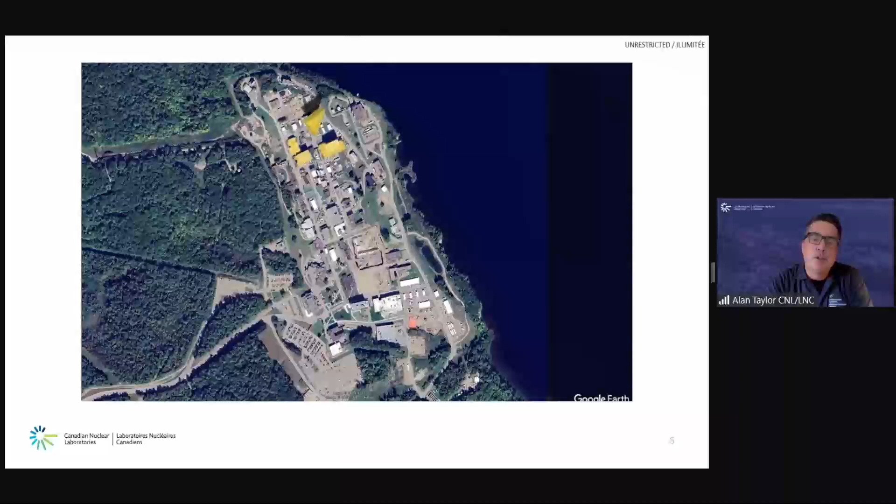All right, we'll start off in the beautiful Ottawa Valley and the Chalk River site. So at Chalk River, we're looking at the two units that are still installed within the facilities, and that is the NRX and NRU reactor.

The NRX and NRU are both research reactors, built and designed back in the 40s and 50s, and have run as recently as 2018.

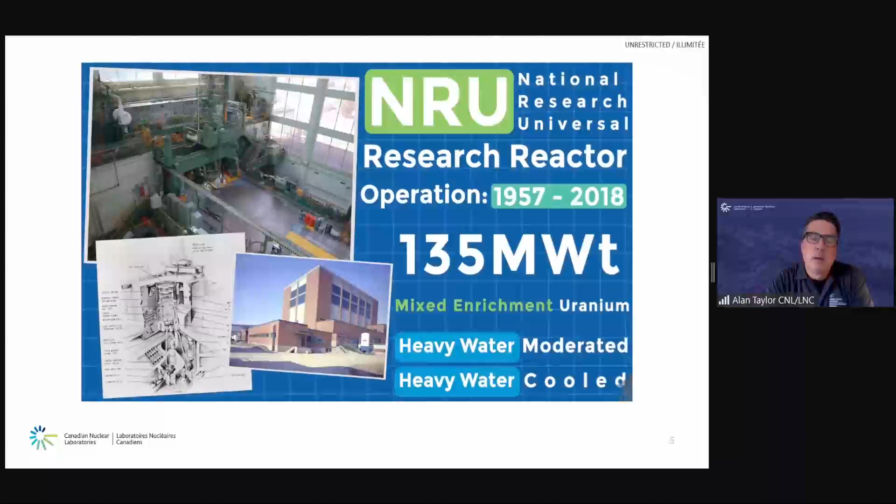We also have in the portfolio the two Maple 1 and Maple 2 reactors. These were isotope producing reactors that were in operation from 2000 to 2008.

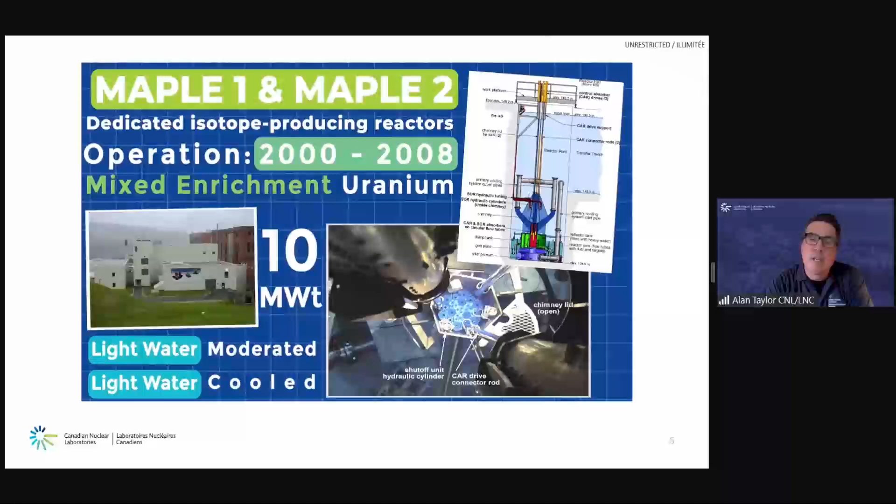Additionally, staying in the Chalk River area, we have 3 legacy calandrias which were removed from service back in the 50s and 70s and now lay to rest in the waste management areas. We have an NRX A, an NRX B, and one of the calandrias from NRU.

Talked a little bit about NPD. NPD is located very close to the Chalk River site. As I said earlier, it's not part of our portfolio, but I think it's important to highlight that it is one of the reactors that AECL and CNL are working on the decommissioning for.

Out in lovely Manitoba, we have the WR1 reactor.

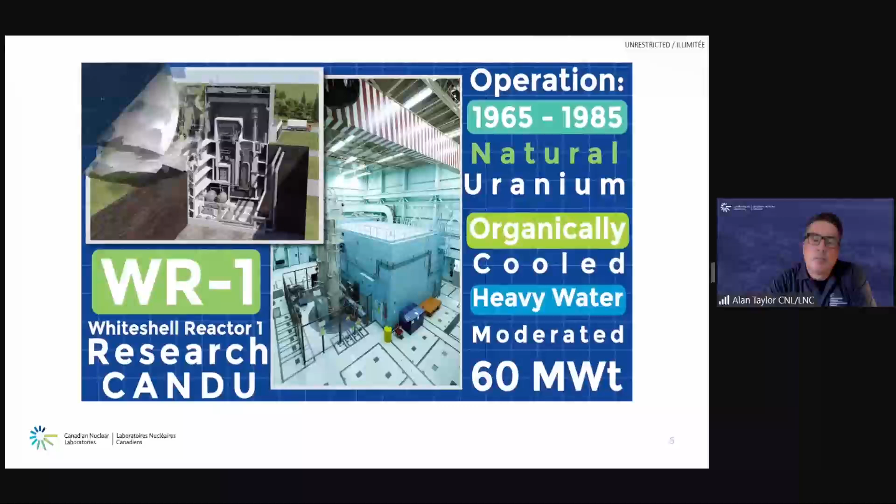And then flipping the script back to the reactors that fall within the reactor seg portfolio, we have the Douglas Point reactor, which is in Bruce County, out at the Bruce Power site. This is actually the second in line of the CANDU prototypes, prior to the Pickering and Bruce reactors that were built shortly after.

We also have a unit in Bécancour, Quebec, Gentilly-1, which is a unique design. It was a boiling water CANDU prototype. This unit is located on the banks of the St. Lawrence River.

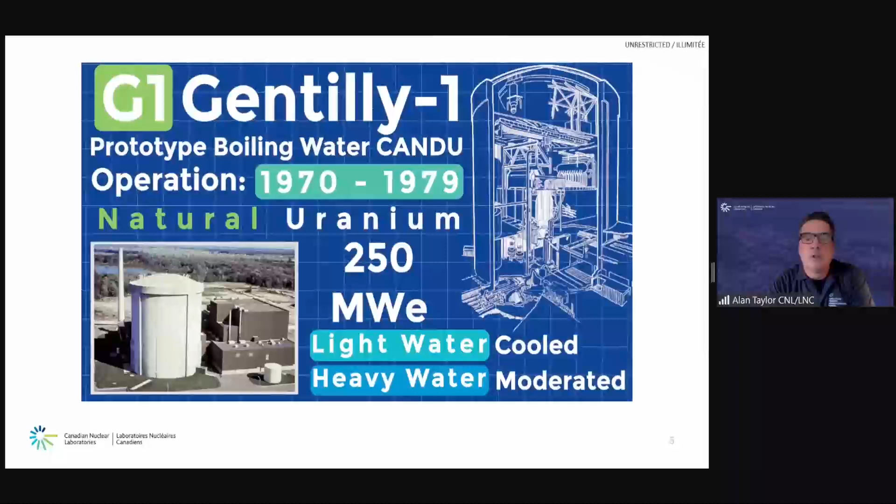All right, so we'll shift to a bit of an overview of a comparison of the reactors. We've had a chance to see where they're located geographically, but let's go over a few points about a comparison between them. Starting on the left side at the G1 and Douglas Point site, those are located off-site of Chalk River. And then we have the NRX, NRU, the Maples, and the 3 legacy waste units - they are in the Chalk River site.

The units that are titled in blue are installed in their bioshields. A bioshield is essentially a large, heavy-duty concrete structure within a robust building - that's where the reactors are located. The other 3 units in the legacy waste category are placed in legacy areas of the waste management zones at Chalk River.

When we look at how we go about moving waste, once we start dismantling these reactors, the Douglas Point and G1 sites will have to utilize public roads to move specialized containers. But for the other units, all the movements of material will be within the CNL, the Chalk River lab site.

For the movement of the waste, we make sure that we are using specialized containers designed for purpose, and moving them to approved storage areas.

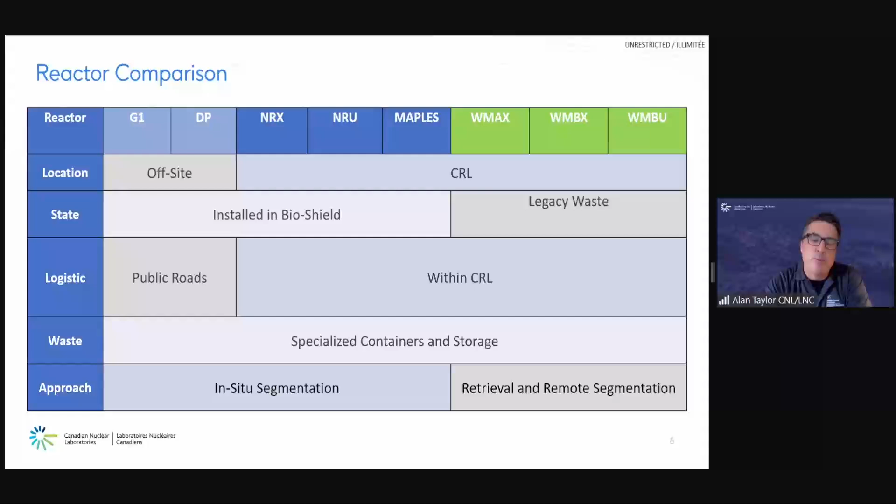All right, let's talk a bit about strategy then, and how we've developed our plans on where we are now and where we need to go in the future.

When it comes to developing strategy, there's certainly multiple items to be considered, but today we're going to talk about 6 key aspects that we've put in place in order to develop a strategy output. Those are review of records, modeling, collaboration and benchmarking, technology, waste options, and a discussion about optioneering or best available technique study that we do. And then I have a video that's going to show some of the good work we've been doing from a characterization standpoint.

When you bring in those strategy inputs, then they lead you to a strategy output that we believe will be successful for us to complete the portfolio of work.

From a records and modeling standpoint, we take a lot of time to review our records, things such as operational records from when the facilities were running, construction drawings, or any modifications made to the facility. It's to gain an understanding of how these units were constructed. Units like NRX were constructed back in the late 40s going into the 50s. The Douglas Point site and the Gentilly site were built primarily in the 60s. So we go through the records and ascertain all the information we need to make intelligent decisions on how we move ahead. A big component of our work is reviewing these records and looking at the historical operation.

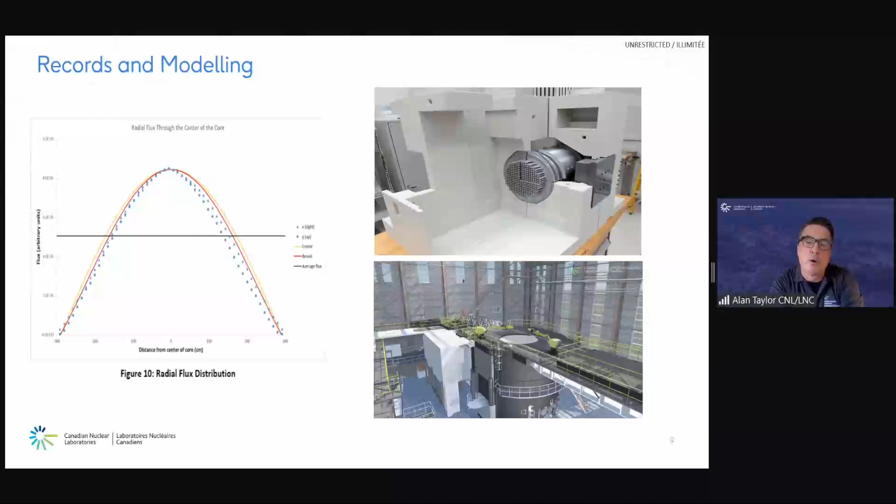Finally, on the bottom right, we have a team of experts here at CNL doing digital renditions, or digital twinning. That's something new to us - we're taking our information on these reactors and creating very detailed and sophisticated models. These models are fantastic for putting our plans together. We can input all sorts of criteria into them, including activity modeling or radioactive readings that we get when we're in the field, to help us put together a safe and robust plan. It's another tool that's very valuable for sharing what we're about to do with the public, giving an idea of the units, how they looked, how they're laid out, with a real benefit towards understanding.

Our second key component with regards to our strategy inputs is collaboration and benchmarking. We're not the first country in the world to do this type of work, so it's important for us to learn from our counterparts. We have collaboration agreements set up with Germany, France, the UK, and the US. No one in the world has yet to do a CANDU reactor, but we glean lots of information. We share information and lessons learned with our collaboration partners and can put that into part of the planning on how we dismantle our reactors. It's key that we maintain a robust collaboration and benchmarking effort to stay up with modern practices, to share information with our colleagues, and to glean it from them.

With regards to technology, there's no one-stop shop for how you dismantle these units. We know we're going to be dealing with material that could be heavily activated or highly radioactive, so the luxury of handing a set of hand tools over to capable workers and asking them to go in the field and dismantle these units just doesn't exist. We will be using remote technology, robots, tools, etc., that will allow us to work in a safe, remote environment in order to segment the units.

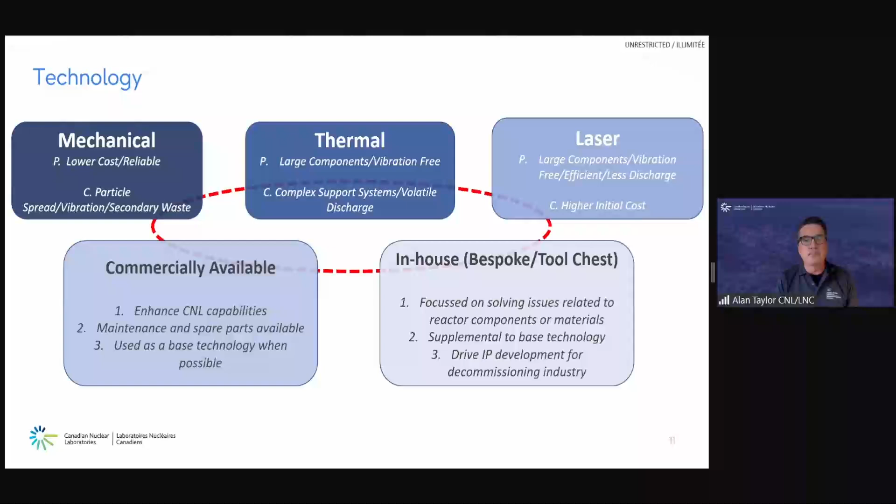So with regards to waste, there are options on how we handle our waste when we start segmenting these reactors. All of our waste and how we package it and move it is governed by very robust procedures and the use of pre-approved packages prior to dismantling.

So think about it this way. Once we're in the field, prior to completing any cuts, we will have a number of different options of containers to choose from. And we'll fill those containers based on how we want to transport them, where they are going for interim storage, where they may be going for direct disposal - I'll talk a bit about that from a commercial standpoint - and making sure that they are robust and approved for road transportation.

When you segment and dismantle reactors, you're going to primarily be dealing with what we refer to as intermediate level waste. This is waste that requires special handling and requires special packages, and we utilize those as we dismantle the units. Our two primary options for waste paths are interim storage at the Chalk River site, and

we're also investigating the possibility of using the supply chain. There are companies that do deal with radioactive waste. They work with the utilities and work with other areas. And they have the capabilities of taking our waste directly and then processing that in more of a disposal mode.

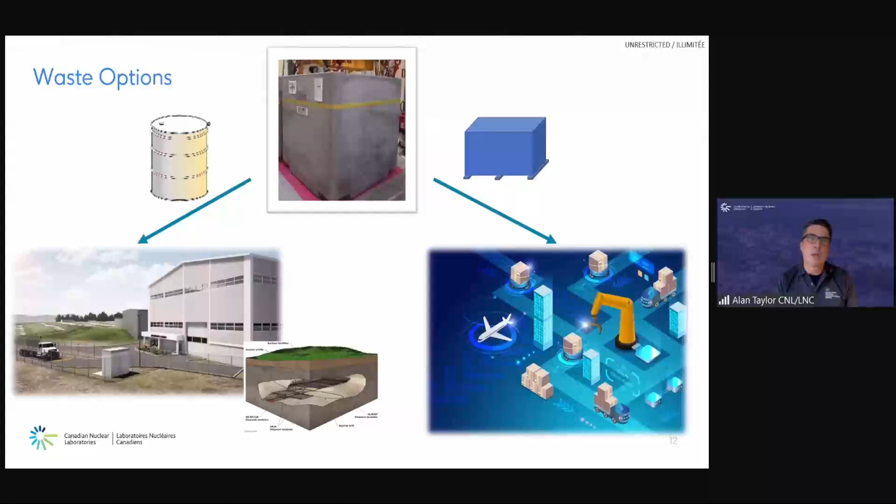Another aspect of putting a strategy together is to utilize a best available technique, or an optioneering process. Really, in a nutshell, what this is, is to identify the challenge that we have in front of us, and then we pull together a formal collaboration of experts that we have in-house.

So we're bringing in waste experts, we're bringing in reactor segmentation team experts, we have mechanical equipment development experts, and characterization experts, etc. So there's a number of different groups, and the best way to describe this is it's essentially a sort of professional brainstorming, so to speak.

We identify the problem, and we define what our scope is, what our boundaries are, constraints, assumptions, etc., and identify attributes. And then at that point, we are essentially meeting to throw any and every option that we can come up with on the table.

We've seen upwards of 24 options that have come out of these brainstorming discussions. But it's important that we need to whittle those down to 2 or 3 really viable options. And we do that by really challenging and breaking down the ideas and scoring these options against attributes that we've previously identified. These attributes may be things such as how easy is it to access the components, or do we have the ability to put these directly into a container, or do we have to do a bit of processing prior to. So a number of different things. But essentially, once these attributes are scored, and we've added weighting factors into it, we'll end up with a result on what our best approach is on segmenting and dismantling the units.

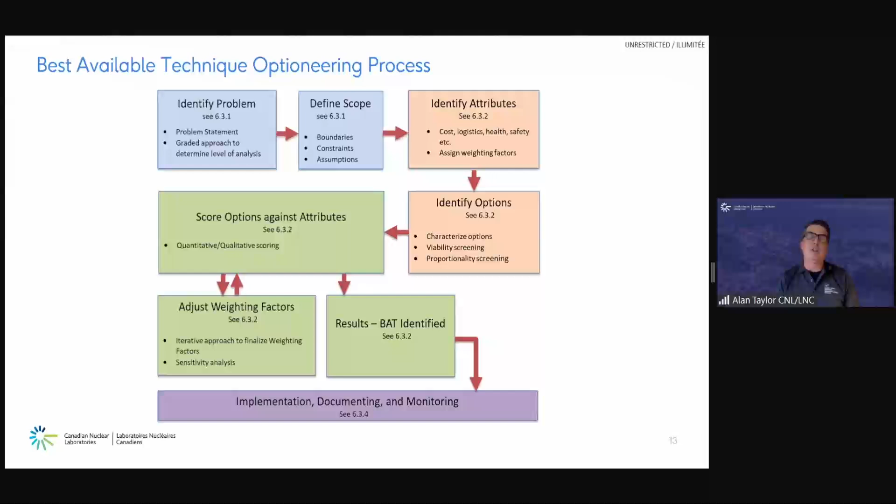All right, so our final attribute with regards to strategy is characterization. And characterization has really been what we've been up to for the last 2 or 3 years. So we have had teams at the Chalk River site, the Douglas Point site, and the G1 site putting together and pulling samples out of the reactors themselves.

Now, the goal of characterization really is twofold. Once we retrieve these samples, they're sent to a laboratory to be analyzed. And then the information that's gleaned from the analysis will be used to decide on a number of different things, such as how we're going to decide which path the waste takes, but also how we're ensuring that we're protecting the worker and the environment and understanding the hazards that are involved.

Additionally to that, the characterization output will help drive the design of our tooling. We can understand how radioactive a component is, and that may allow us to decide whether or not we need super specialized tooling, or can we get away with something that's more simplistic.

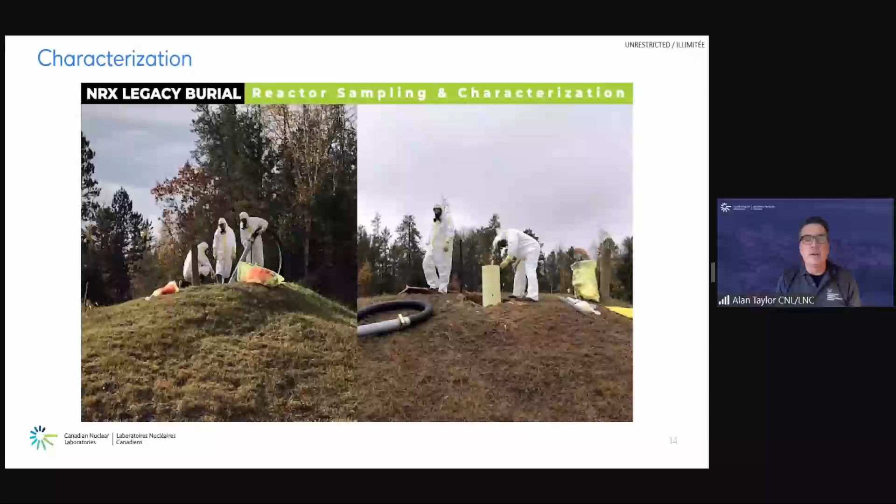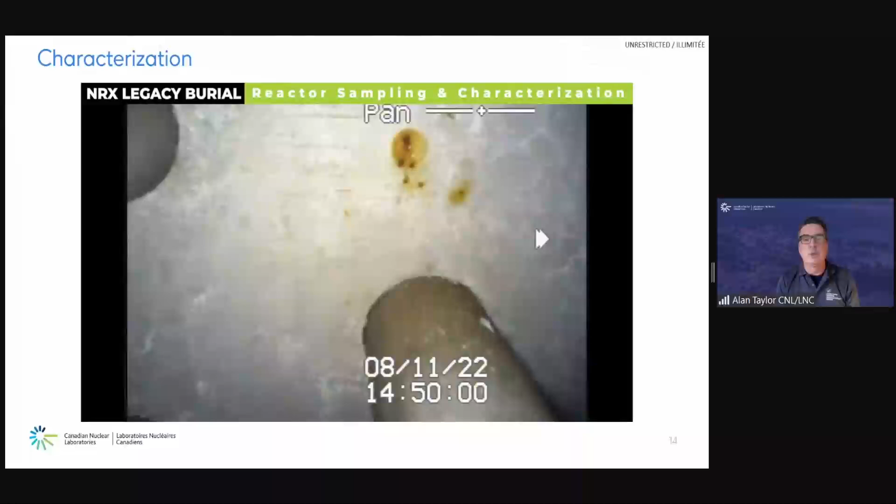Starting off with the buried units at Chalk River, you can see we're using computer modeling, and our workers in the field starting to perform the excavation to get to the reactor, and ultimately pull the samples out of the unit. This particular unit is referred to as the WMA in-house unit, but it's the original NRX calandria that came out in the 50s. You can see some tooling we used that allowed us to breach the reactor walls and insert video cameras to get information about how the reactor looks in its configuration.

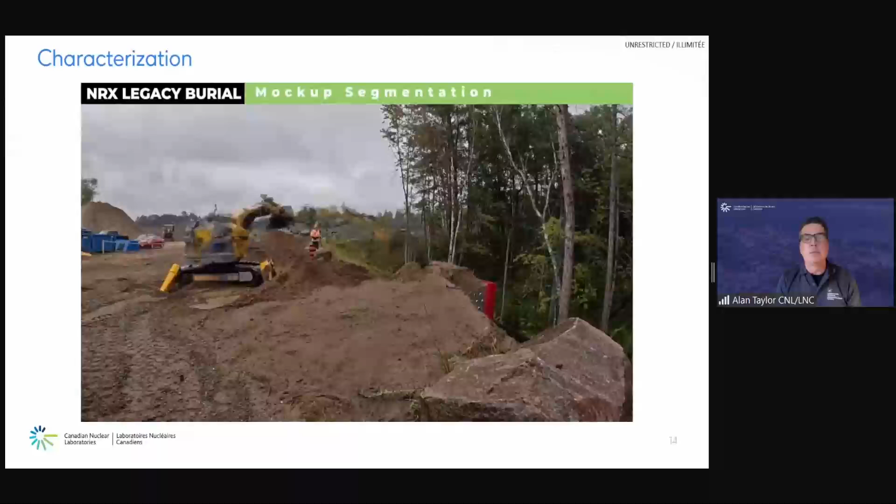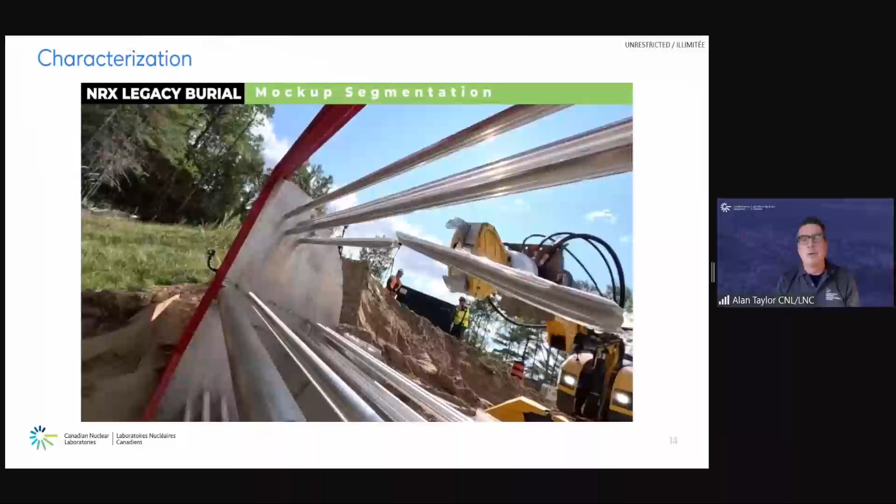Additionally, we've taken some samples of the material and some readings. And this is the mock-up using a Brokk robot. We built a mock-up, placed it in one of our areas in a clean environment, and this is allowing us to see what works and what doesn't work with regards to robotic disassembly of the units.

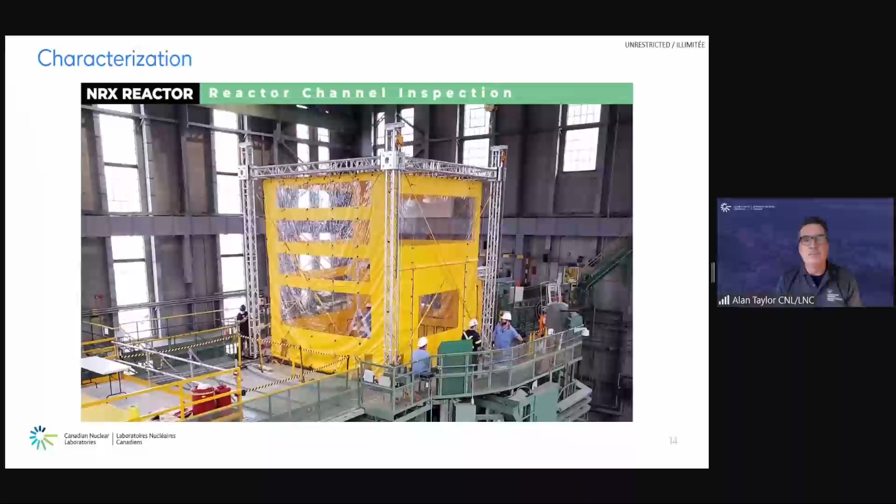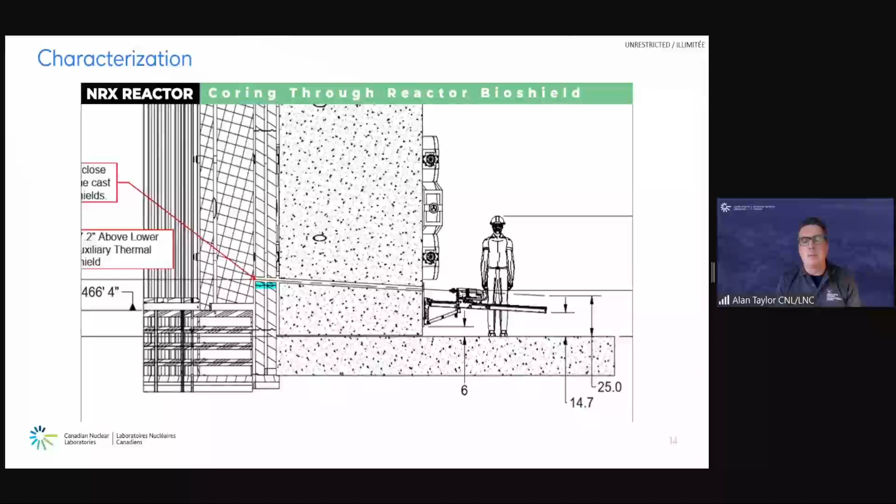Shifting inside, there's a lot of work going on at the NRX reactor: coring holes, taking metal samples, taking concrete samples, gaining information about the graphite installed in the units and other materials. A lot of hard work going on by dedicated team members to pull this work off, and it's been exciting. Had a few challenges, but overall it's been really good work for everybody.

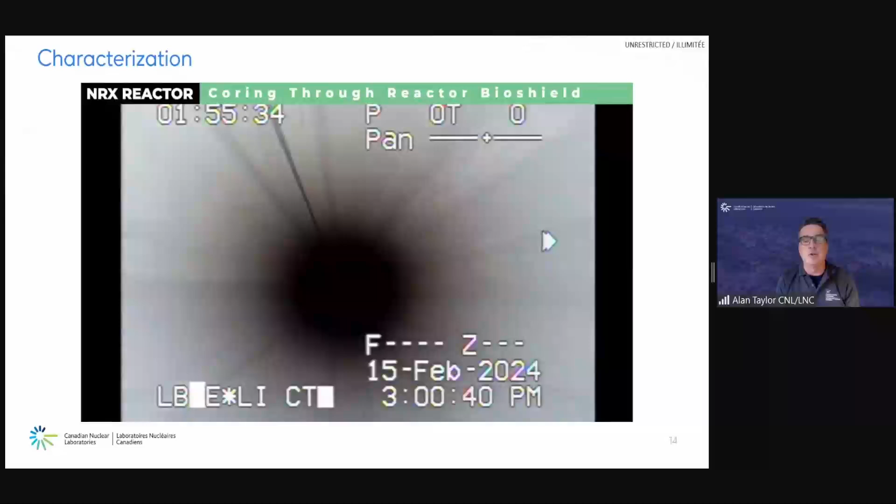Here we're utilizing a combination of off-the-shelf equipment and specialty design tools. You can see a video of the camera going through the concrete core and then eventually into the walls of the reactor itself.

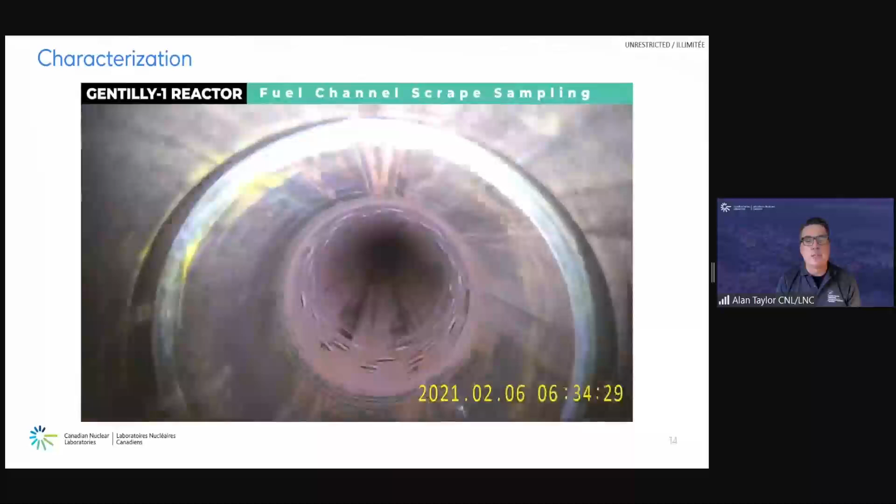At the Gentilly-1 reactor, we've done some internal scopes and measurements of the fuel channels themselves. We got video of going up into a fuel channel, took some readings, and gained a lot of information about how the reactor is configured.

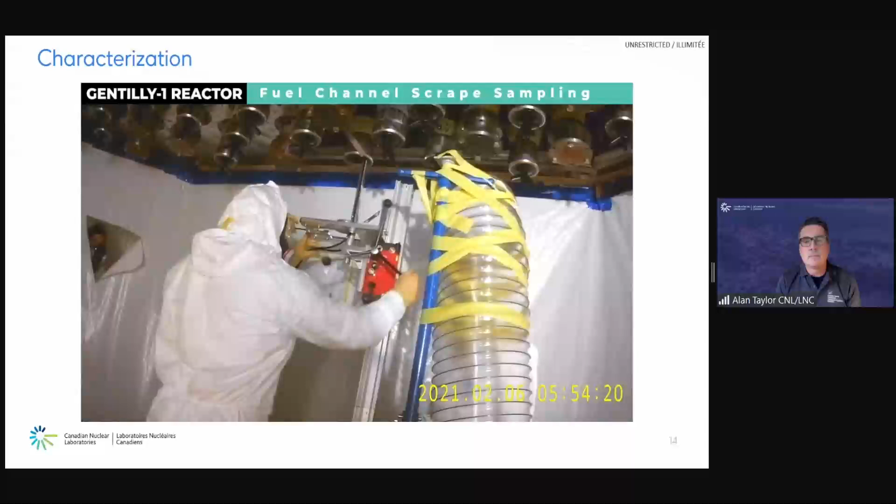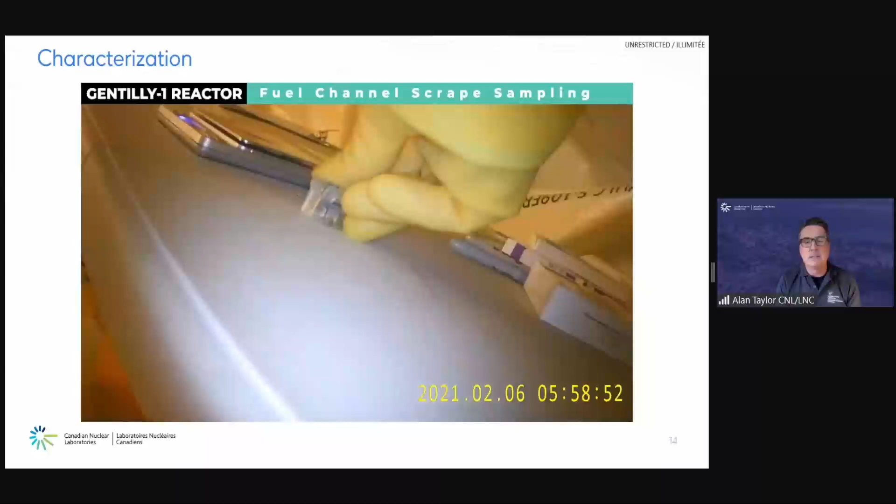Once we get our samples out, we use a chain of custody to take the samples, take some information from them, and then ship them safely out to a lab for analysis.

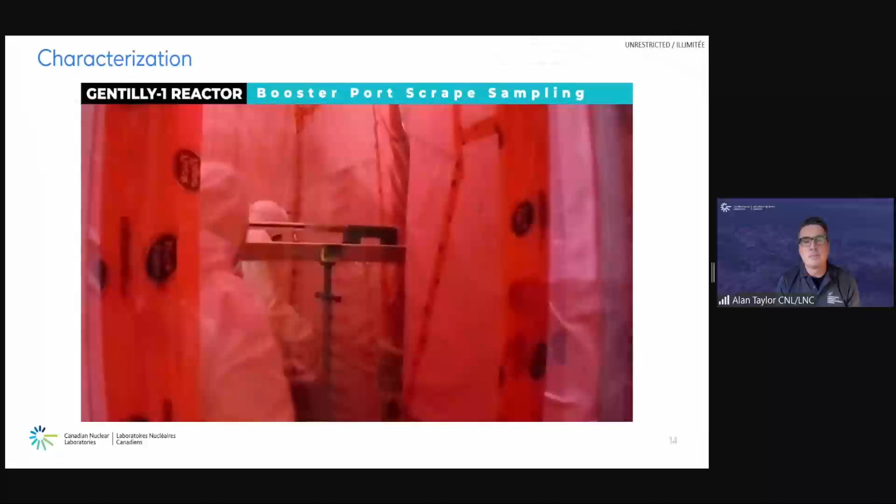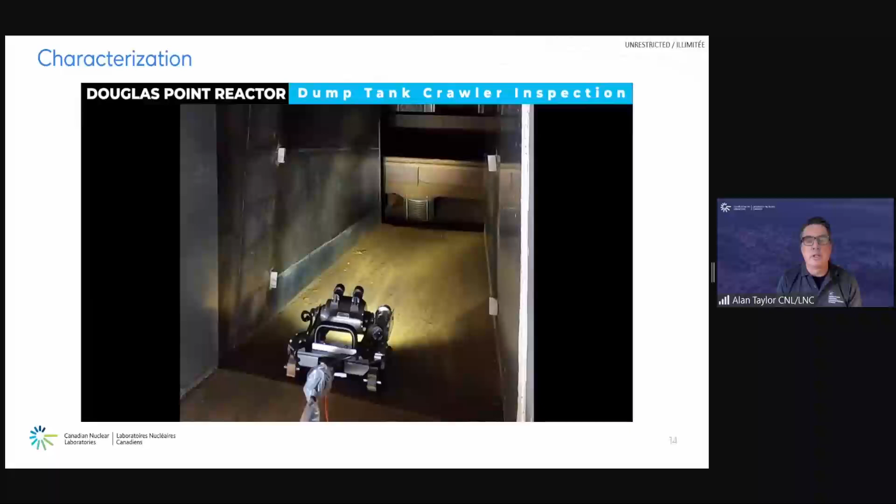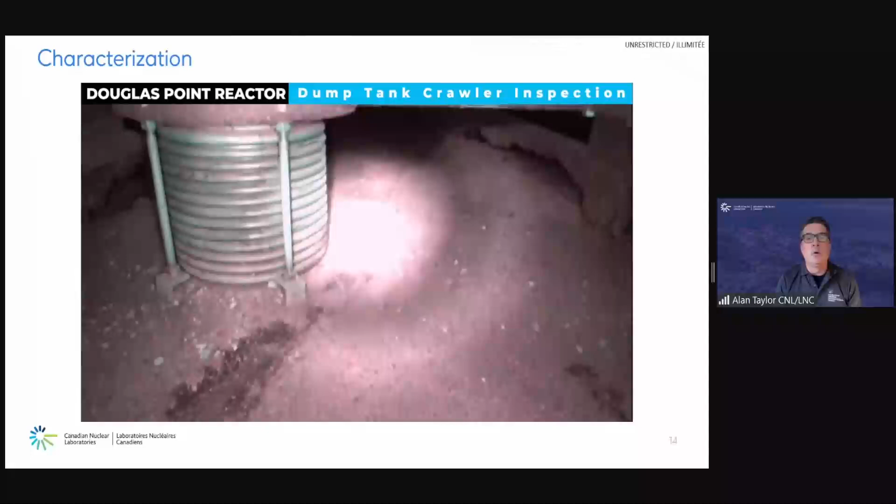Douglas Point, we have a team that's down there actually as we speak, doing some characterization. But prior to doing the characterization work that was more intrusive, we used one of our little specialty robot crawlers to go into the vault and take some video, give us an idea of the current status and how good of a shape, or in this case, perhaps not the best shape, the units are in right now.

So you're looking at the bottom of the moderator dump tank of Douglas Point. And then finally, at Douglas Point, we're in doing samples of fuel channels and gaining information about the radioactivity within the unit itself. Pulling out some of the core samples. There's a video of what it looks like inside the vault.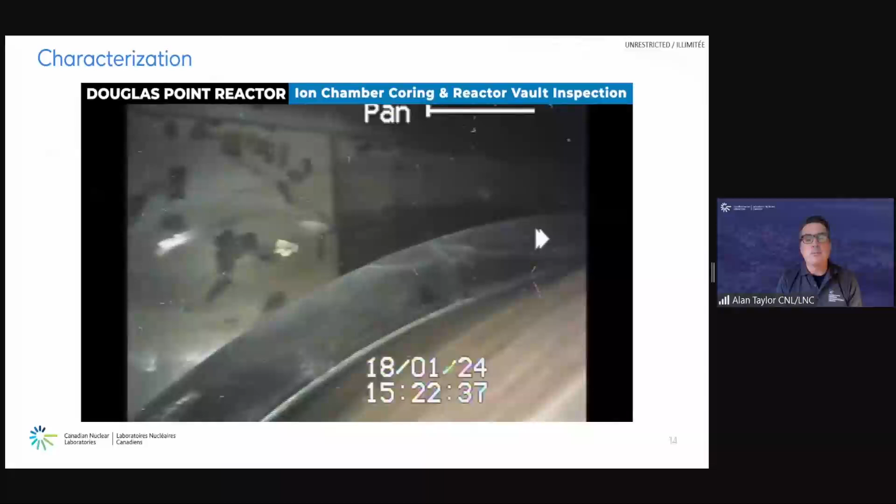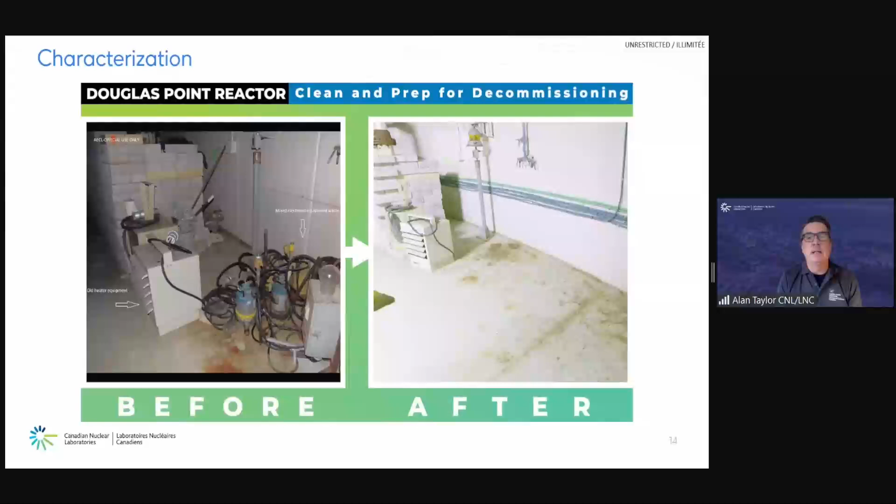That's the calandria of the Douglas Point unit, which shut down in about 1984. It's also important to note we are working with the teams at the sites to do a lot of housekeeping and cleanup of some of these facilities as we undertake the work prior to the overall decommissioning of the units themselves.

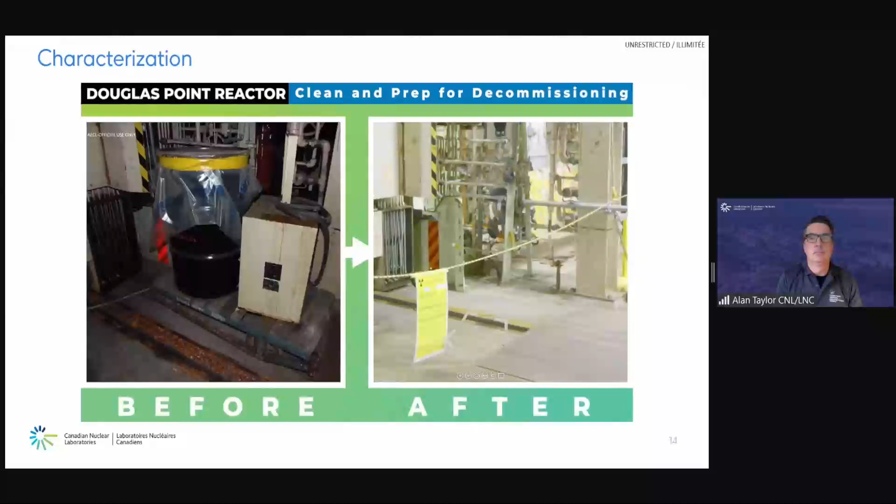So we've talked about the 6 inputs into our strategy, and what they drive then is a standardized or holistic approach to how we want to deal with these units. For the installed calandrias, thinking back to the slide that did the comparison, we're looking at doing in situ segmentation that aligns with the fuel channels. So what does that really mean?

Well, we have reactors that are installed within the concrete bioshields, and each one of these reactors have a number of internal pipes where the fuel component or the uranium component of the reactor resided. These we find are in either a vertical or a horizontal configuration, and we are going to take a look at our dismantling following the axes of those fuel channels.

So we start with removal of the rod assemblies, and once those are removed and packaged up safely, then we move into remote segmentation using robots for the calandria themselves. Calandria is essentially a large tank. And then once all components are removed and packaged, the waste is transported to its proper waste storage or disposal area.

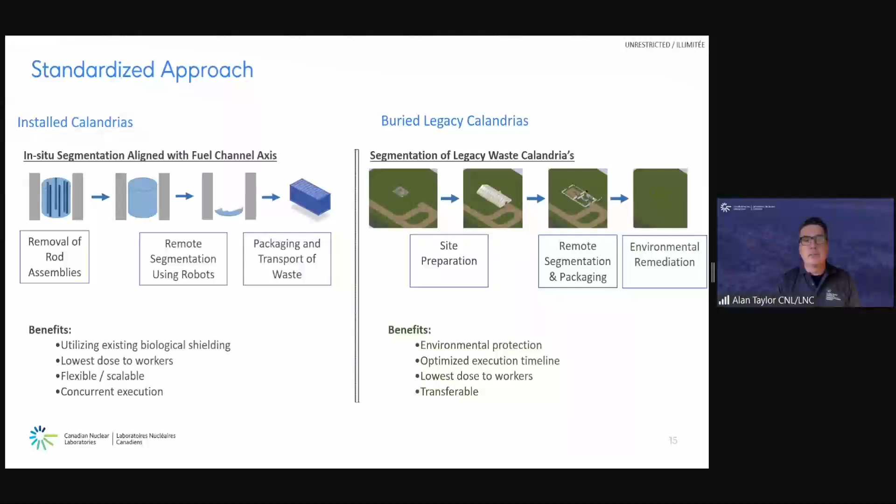All right, so finally, let's talk a little bit about dismantlement and a dismantlement concept. So what you see here, we'll use Douglas Point as an example. This is a rendition of the Douglas Point reactor itself. Douglas Point was a 200 megawatt CANDU prototype. Think of it as the little brother to the Pickering sites or the Darlington sites, etc. And it's installed within the concrete bioshield, as I've mentioned on a couple of slides. How do we go about dismantling the unit?

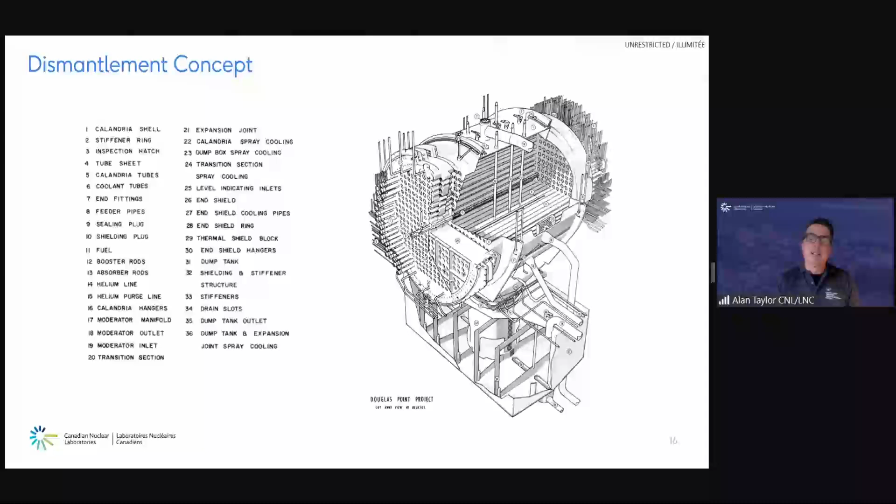So let's look at a dismantling sequence. At a very high level, what we do with regards to dismantling units such as Douglas Point is, first of all, start with the removal of the reactivity mechanisms. When a reactor is built, not only does it have containment for fuel or containment for water, there are a number of components that are used to ensure that the reactor is safe to operate and is controllable, and we refer to those as reactivity mechanisms.

So these are essentially the items that were used during operation to make sure the reactor was functioning properly. Those would be the first items that we remove, segment, and package. Then from there, we're looking at the removal of the calandria and pressure tubes, starting with the pressure tubes.

Mentioned earlier in one of our strategy outputs that we're going to work on the fuel channel axes. What that means is that we are developing tools using in-house expertise to pull what we refer to as the fuel channels out of the reactor.

At Douglas Point, there's over 300 fuel channels, made up of zircaloy pressure tubes and calandria tubes, and some very heavy end fittings. We have tools that we will dismantle those channels with, remove them from the reactor itself, and then place them into suitable packages. Once the fuel channels are removed, then we move on to the actual dismantlement of the calandria shell.

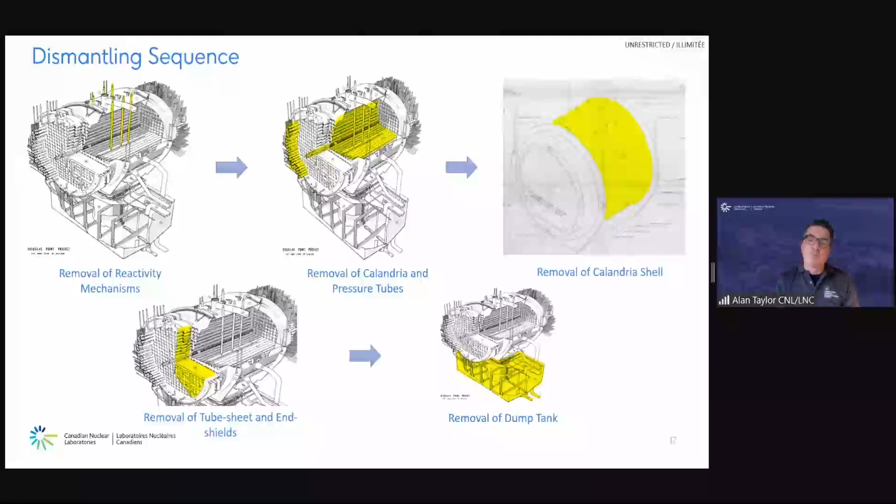So that pretty well covers everything with regards to developing strategy and giving you an overview of how we would go about segmenting these units. It's a lot of work, it's exciting work, and it's interesting. And it's certainly fraught with some challenges and opportunities.

But I'll open it up now for any questions that we may have from our viewers.